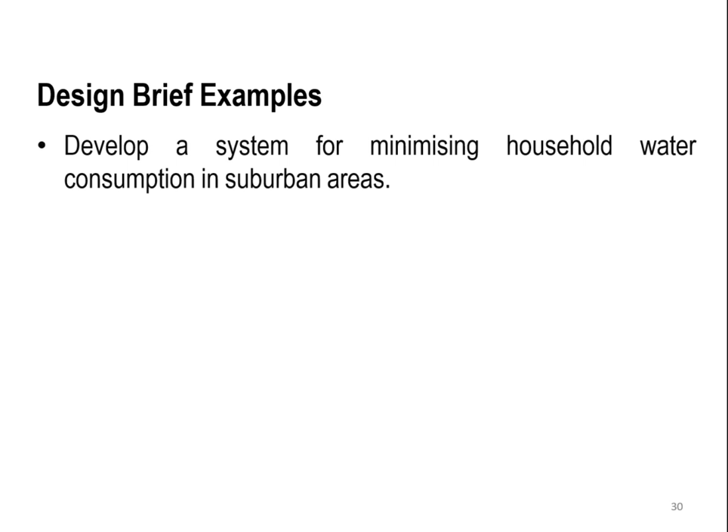So here are some design brief examples we're going to talk about. For example, we need to develop a system for minimizing household water consumption in suburban areas. The second example can be design of a 35 foot sailing boat with accommodations for at least 4 people for up to 1 week of cruising.

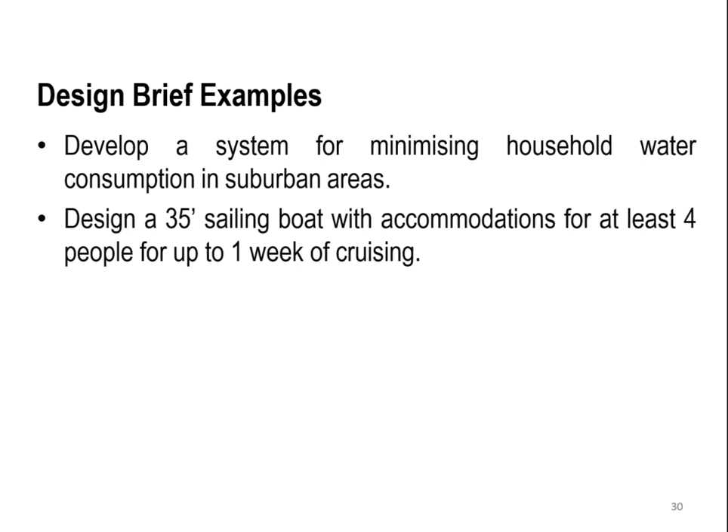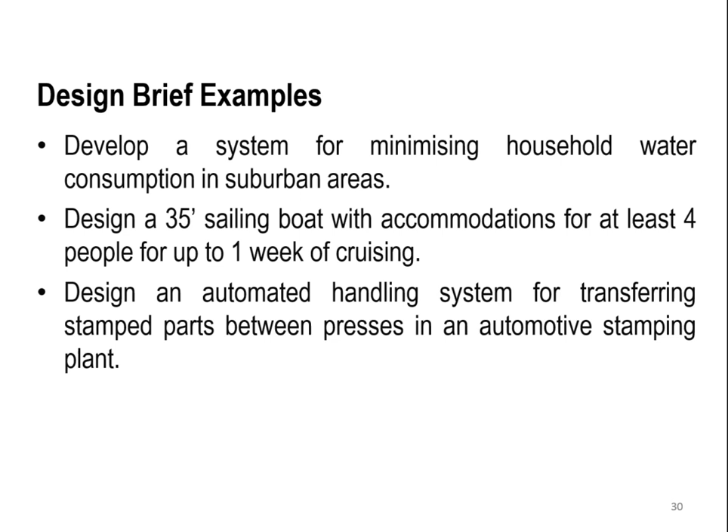Something like where to store the food, where to store the water, will be enough for the 1 week of cruising. Second, the design of an automated handling system for transferring stamped parts between presses in an automotive stamping plant.

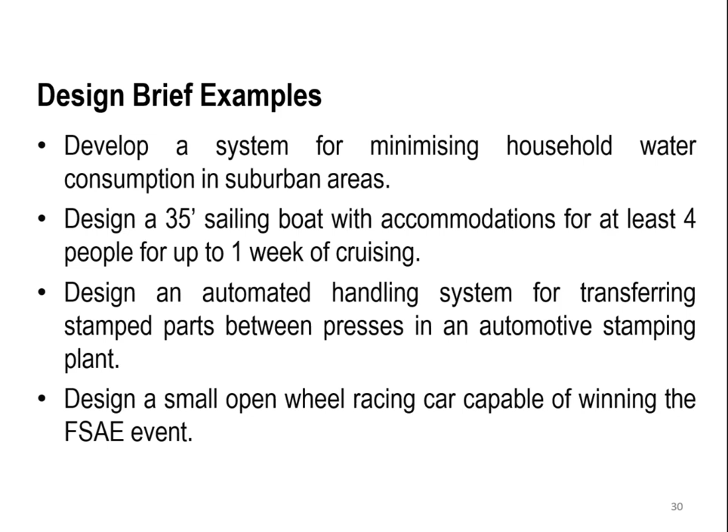Another example can be design of a small open wheel racing car capable of winning FSAE events. So mainly we're going to talk about the last one because most students basically try to work with this design, and I have no problem if students have the same project in their final report. So the design brief questions are very important.

You will need to ask yourself many questions about the design brief, like for example, who is the customer? What do they want? How much will they pay for it? And when do they want it? Do you have any competitors in this market? What target will you set? And how can you measure the success of your design? There are other questions that can be related around the same topics.

So the design mission statement for the spectacular lamps would first be the product description, like a standalone lamp for desk use, with bright lighting, where funky shades can be used. Also the key business goals, like exciting a new market for consumers - the primary market being young professional workers, the secondary market being students - and the stakeholders, which can be Western Sydney Uni student engineers design team, the lecturer and tutors, and Australian lighting manufacturers.

So you need to identify the customer needs, like gathering the raw data from customers. You can do that by doing interviews with customers, making focus groups, and observing the products in use. To remind the customer needs from the data: what, not how; the level of need; positive, not negative; and attribute of the products. Avoid the must and should.

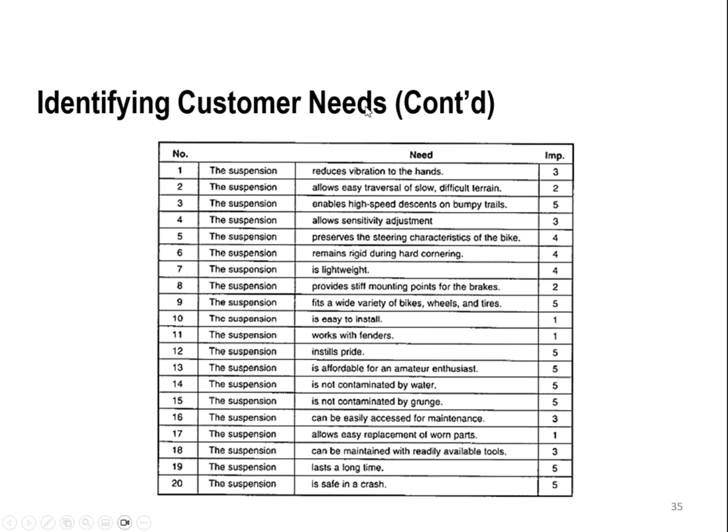Safe in a crash, last long time. So you can simply categorize the things for the customer needs, and then you can start to work to analyze them. Now we're going to establish the product specifications. So what you're going to say is that we need to prepare a list of the metrics that will influence the product performance. You can use that as a benchmark for the other competitor products and set a target range and reflect and review.

So it is vital that your design team develops a metric and targets. How else are we going to evaluate how good your design is? So the design metric, once again, we are going to have the metric listed: the needs numbers, the metric number, the importance, and the units we are going to have for this implementation.

Like for example, I'll take the spring preload. The unit is going to be Newton, of course. The needs numbers were 2 and 6 from the previous list. And we can take, for example, one of the important things like the wheel size. That's in number 9. And the importance is going to be 5.

And this will be actually done in... wheel size should actually be in inches, I don't know why it's written like that. The maximum tire width is 5 in inches, and the time to assemble the frame is going to be 1, and this can be done in seconds. The monster cycles to failure will be 5, and this will be considered by cycles, and so on.

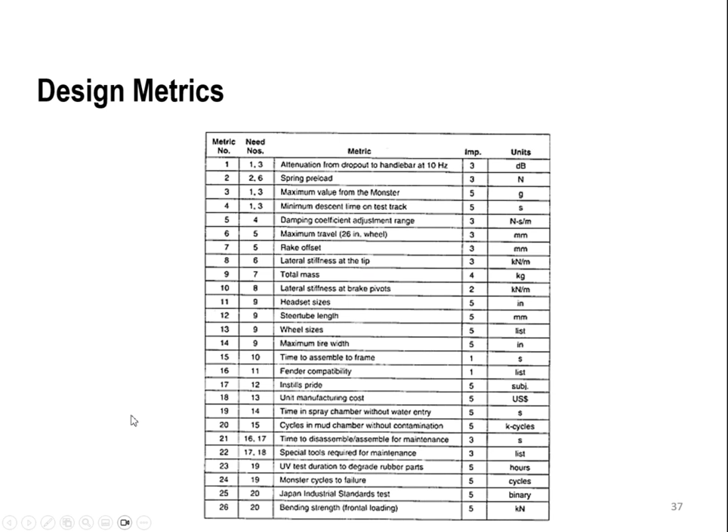So what we can do is bring the two tables together, and we can have one matrix index about the needs and the metrics. So we can simply join between the needs and see which one is going to be the most important for our case. You can see that we have here from 1 to 26, and simply we're going to have them here from 1 to 20. Then we can connect with them and see actually how they're going to be a benchmark base for our design.

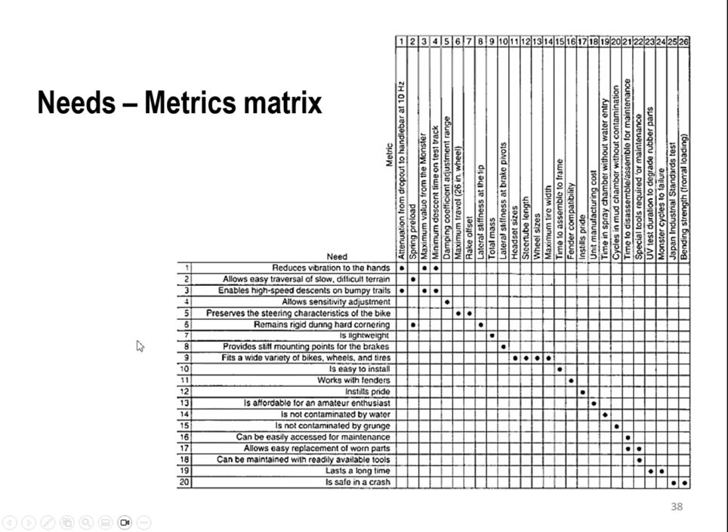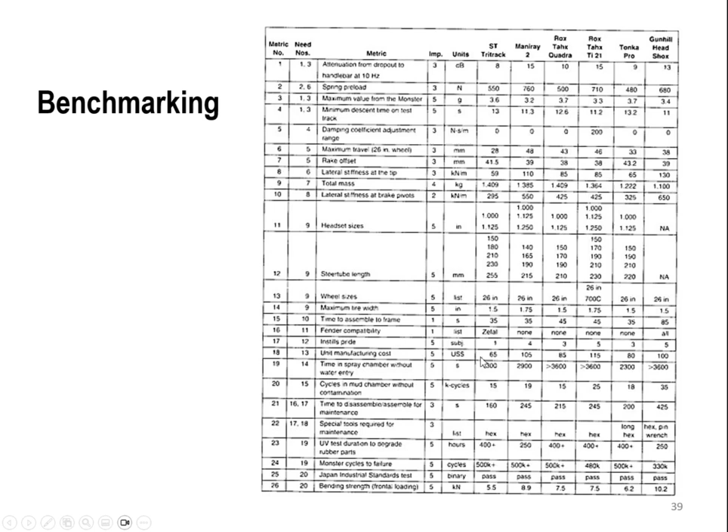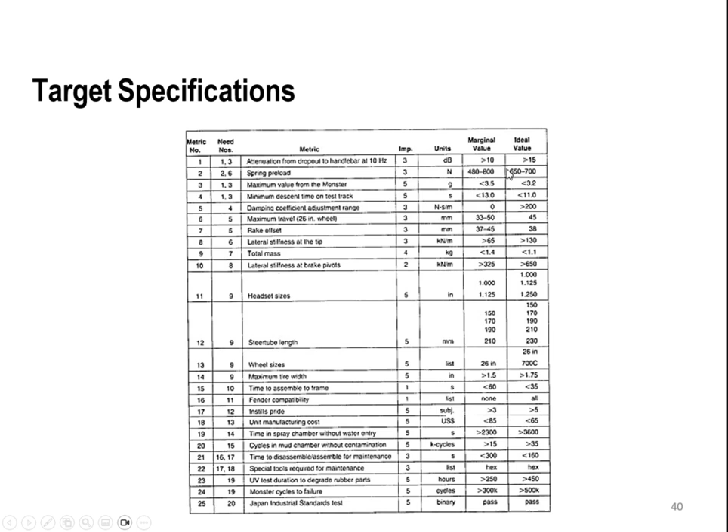From the survey, sorry. The target specification now can be analyzed. We can give a marginal value for each one of the metrics that we had, and we start our design according to that. Now, these are the target specifications. We're actually not going to work within this big range, so we need to do some refining for the specification.

So we can do the refining of the specifications, like developing the technical models of the products, developing the cost models, refining and rationalizing the target where necessary, and reflecting on the results.

So we can simply have a model to assess the technical feasibility. We can use the suspended mass, the unsprung mass, the orifice diameter, the spring constant, the oil viscosity to feed the dynamic model of the suspension performance by doing the analytical one.

And then we're going to get the output, like the attenuation at 10 Hertz and the estimated Monster g's, and so on. So that's what we have. We're going to have an input, and the output will be based on the input according to the analysis we're going to have for the dynamic model of the suspension performance.

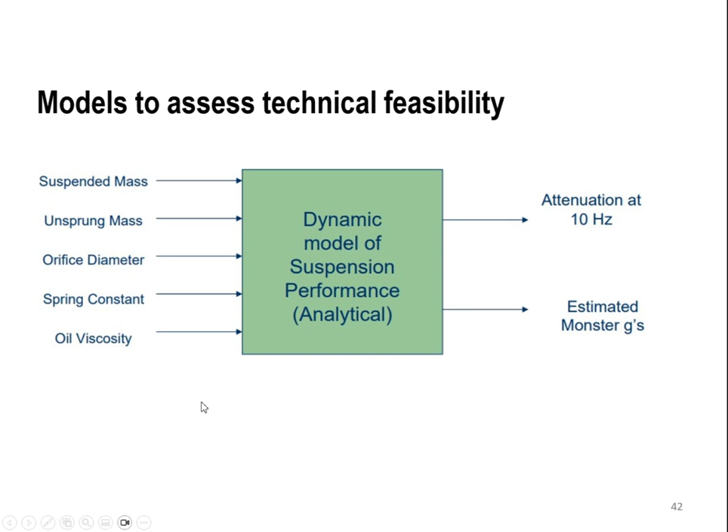This can be something like a MATLAB Simulink model, or it can be just simple software where you can put all the information, or the ANSYS model that you are going to build. And these are the data you are going to submit to find what will be the output according to these parameters. So by refining the specifications, we're going to have the final specification list, and we can work on that.

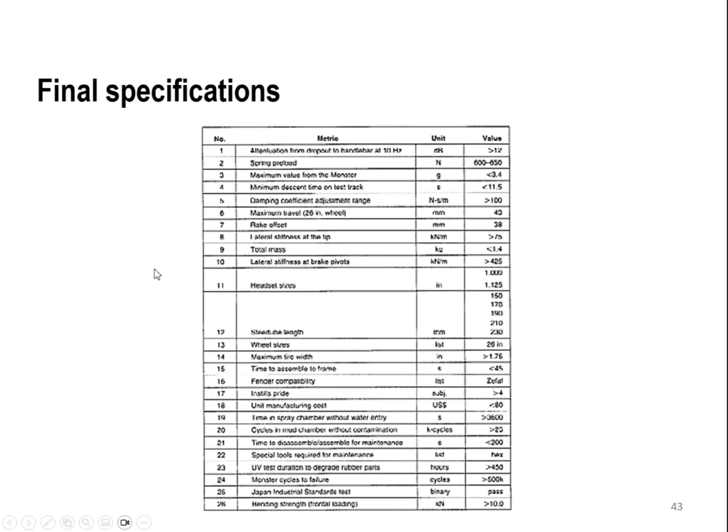Now you need to do that in teams, so we're going to need to build an effective team. You need to define the clear roles of every team member, agree upon the goals, define the procedure, develop an effective interpersonal relationship, and define the leadership roles, because this will be very important.

As a tutor or lecturer or subject convenor, I need to talk to a representative from the team who's going to brief me about the progress, tell me what they need help with, what they know, what they don't know. So we need leadership to do the work.

The digital design project planning: each member of the team should keep a logbook, each one, not a single logbook. Put together an organizational chart. We need to arrange important milestones and dates on the timeline. Don't leave everything to the last minute.

With 3 people in the group, you can do the work in small portions along the short time of the project or the semester. Then you can finish everything well before the end of the semester, so you don't have to rush at the last minute and ask for an extension on this or any other project.

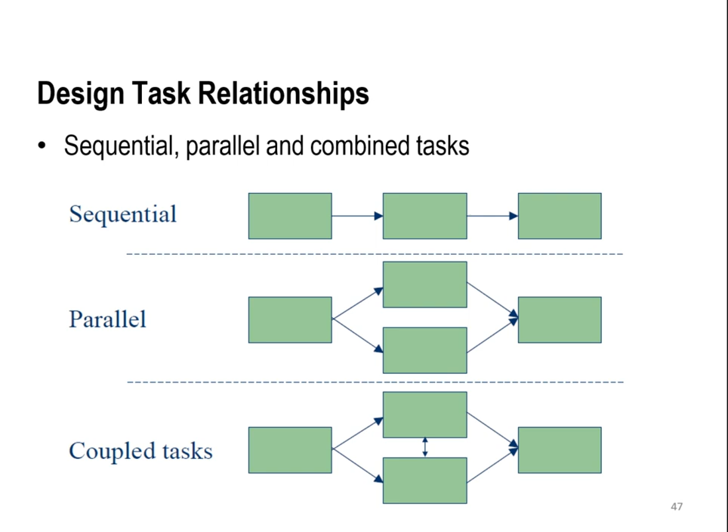The sequential one is just following one into the other. The parallel one involves working as a team, two groups, to do the task to meet the final input. We can work as coupled tasks, so the parallel ones can be joined together, exchanging information about the compatibility of the two parts, or the performance of each sub-team within one team to get the final targets.

For time management, we can use the Gantt chart, and I think you know what a Gantt chart is by now. We can use Microsoft Project to make the Gantt chart. You can even use Excel to make the Gantt chart.

But if you search for how to use Microsoft Project to make a Gantt chart, it's very easy to find multiple examples. We'll show you, for example, what the task name will be and what the duration will be for this process, when you expect to start and finish, and it will schedule the Gantt chart for you. Then you can link tasks: okay, now I finished this stage, I'm going to start the next one, and the next one.

The critical path is the longest chain of dependent events, a single sequence of events whose sum of durations defines the minimum completion time, and that's it. If a task's completion is delayed and that task is part of the critical path, then the completion time of the project will be delayed. So that's something we need to avoid.

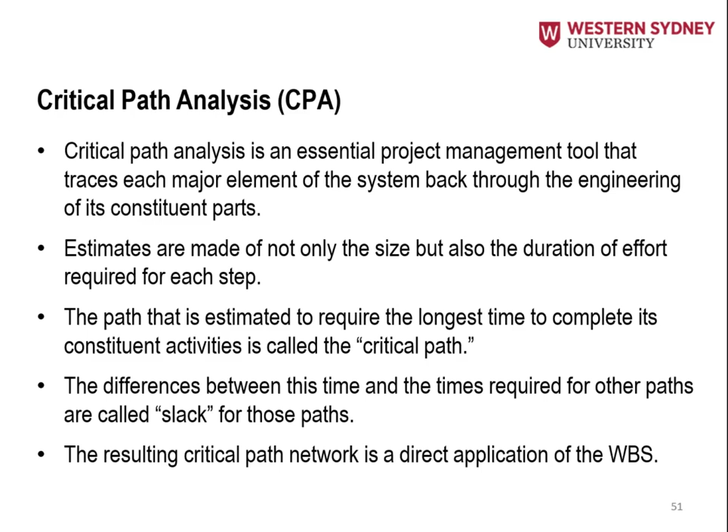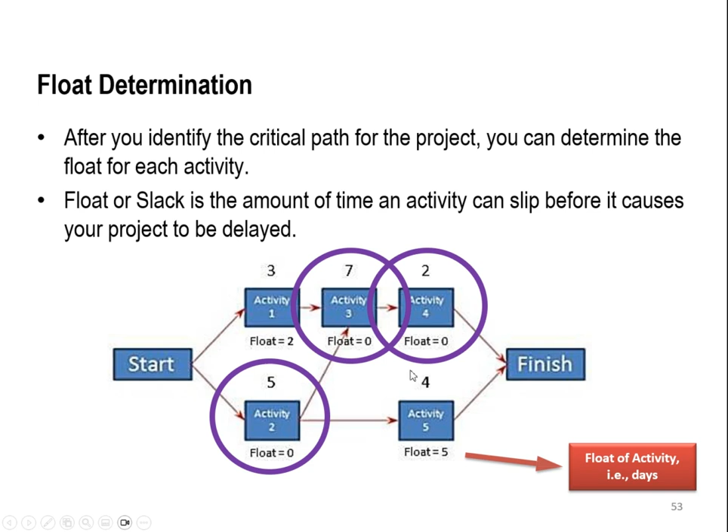Now how did we get that? We said that this path gives us something like 12 days, 14 days for accomplishing the critical path. For the first one, it was 12, so the difference between them is 2 days. From here to the finish is 9 days, so 14 minus 9 gives us 5 days of float.

Now the early start and early finish calculations. Simply, a forward pass is used to determine the earliest date an activity can start and the earliest date it can finish. These dates are valid as long as all the prior activities in that path started on their earliest start date and do not slip.

Starting with the critical path, the early start, or ES, of the first activity is 1, and the early finish, or EF, of the activity is its early start plus the duration minus 1. So ES equals 1, and EF equals 1 plus 5 minus 1, which makes it 5.

Now once again, you say okay, now it's obviously going to be 5. Just imagine that the ES is 2, so this value would be 6. So you don't have to say, okay, now it's obviously going to be equal to 1.

Now the backward pass is going to be used to determine the latest date an activity can start and the latest date it can finish before it delays the project. We begin from the last activity in the path, where the late finish LF for the last activity in every path is going to be the same as the last activity's EF in the critical path. So the latest start LS is going to be the LF minus the duration plus 1.

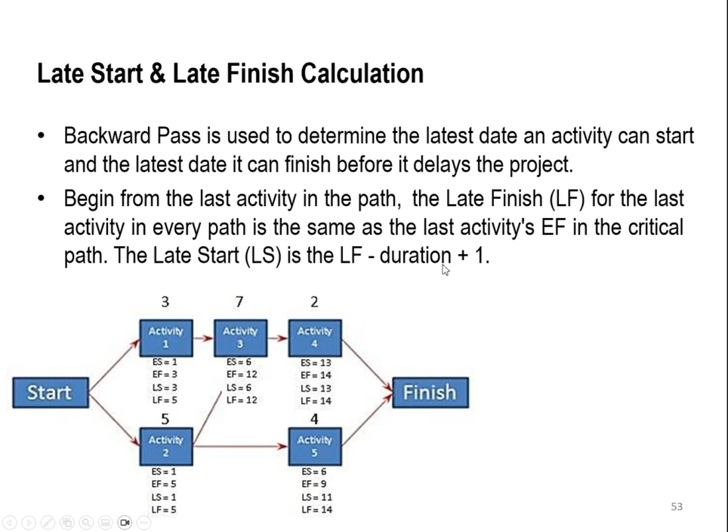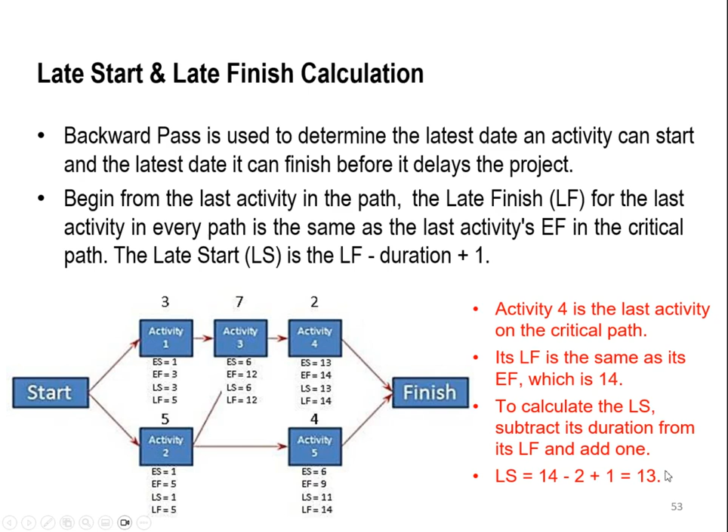Activity 4 is the last activity of the critical path. So the LF is the same as the EF, which is 14. Remember this path was taking me to 14. To calculate the LS, the latest start, we need to subtract its duration from the LF and add 1. So we have 14, the duration is 2, plus 1, giving us 13 days as the latest start.

Now we can simply do that, and the whole thing can be done by using something like MS Project. If you search for that, you can create a project and put all the information within, like a critical path example using MS Project. We can actually share a video for you.